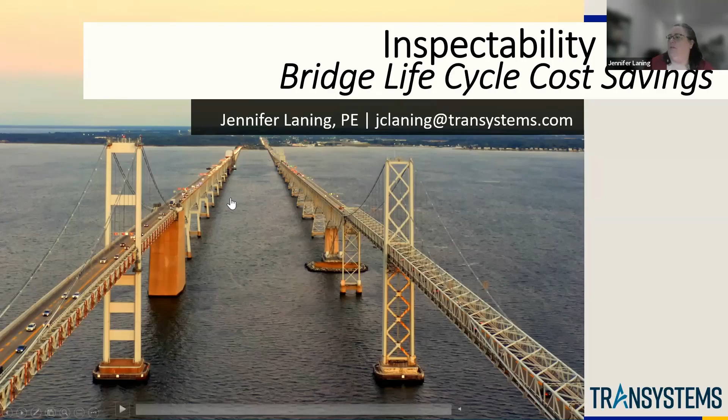Thank you so much for inviting me to share today, and I hope everyone really enjoys the presentation. This is based upon a presentation I gave last year to the National Council of Structural Engineers Associations, and parts of it have also been previously presented at IBC, the International Bridge Conference last year, not the whole thing. So as Lee and Faye mentioned, I've been doing this for a really long time, 31 years.

I'm qualified as a program manager under the NBIS, and also I'm a former bridge owner myself. For 14 years I managed the bridges across the C&D Canal for the Army Corps of Engineers in Philadelphia, all long span steel structures, high level bridges, and I started doing that right out of school. So I have a long time working on both the public side and the private side, and much of what I cover today is really just a lot of perspective about what I do for a living and what the folks I work with do for a living, and how this work relates to what I think is an incredibly important topic now, which is the state of our infrastructure and how we're caring for it, how we continue to care for it, and how we could be more optimized in caring for it when we are working on design projects.

So first, we want to set the table and talk about inspection requirements. The NBIS, as a lot of you may know or may not, is actually recently changing the standards for bridge inspection, but it didn't change things that are really important called the intervals, which is how frequently the inspections of publicly used structures must occur.

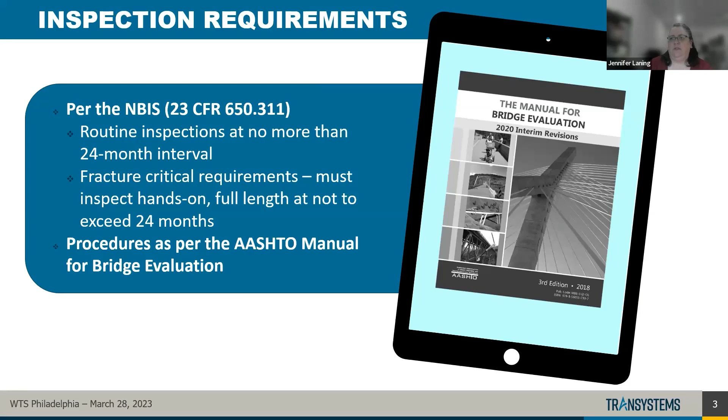So then the procedures for inspection. You're going to see people on bridges inspecting them at no more than 24 months. Sometimes it's less if the bridge is in a particularly challenged condition, but that's generally the status. The procedures for bridge inspection are in the AASHTO manual for bridge evaluation, the bridge inspector's reference manual, and different states also have their own manuals.

Part of inspection requirements is it's a pathway. There's general condition ratings for 1 through 9. And then there's newer standards that make you provide element condition states, which relate the condition state to quantity and are more granular in terms of talking about the individual components of a bridge and where they all fall. It all relates back to whether a bridge is in good, fair, or poor condition.

Then you add in things like appraisal items, which are our traffic safety items and deck geometry. The new SNBI actually takes a hard look at a lot of the traffic safety features and tries to relate that to what the design standards are. So that's gotten a little more complex.

Overall, where we're really at is we're looking at the deck of the bridge, the superstructure of the bridge, the substructure, and then the channel or the waterway. So overall, trying to decide where the bridge stands.

And every year you get these governmental releases of data because all the data is reported back, and it talks about where the state of the bridges are in the country, and how many are in bad condition in a particular state. And it really relates to funding and all those things.

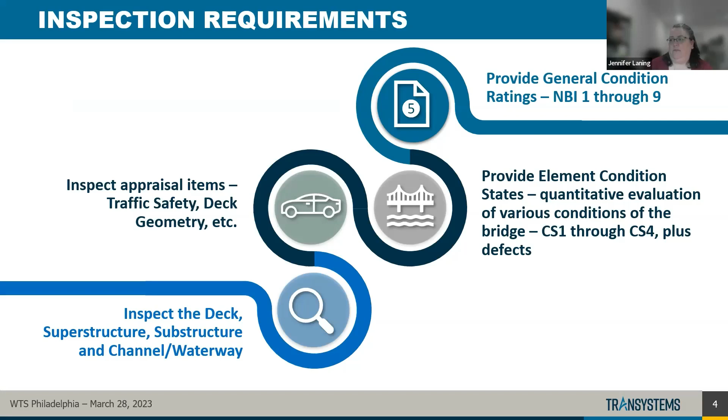And as you know, now we have a lot of the infrastructure funding out of the transportation bill, and taking a hard look at how we can do a better job of keeping our infrastructure in better condition.

So at the end of the day, inspection access is really what it's all about, and being able to access the bridge components and do that in a safe manner. Everything I'm going to say here really relates to safety of the traveling public and our inspection folks.

We need to walk the deck in some way. We need to look and touch the superstructure, which is all the portions of the bridge that's below the deck, including those fracture critical or NRSTM components.

And then we also have to do damage and special inspections based upon whether the bridge was struck, whether there's been an earthquake or a natural event, or whether there's a portion of the structure that we're keeping an eye on for a particular reason. Or if there's a special requirement like gusset plates for a bunch of structures that you need to perform inspections.

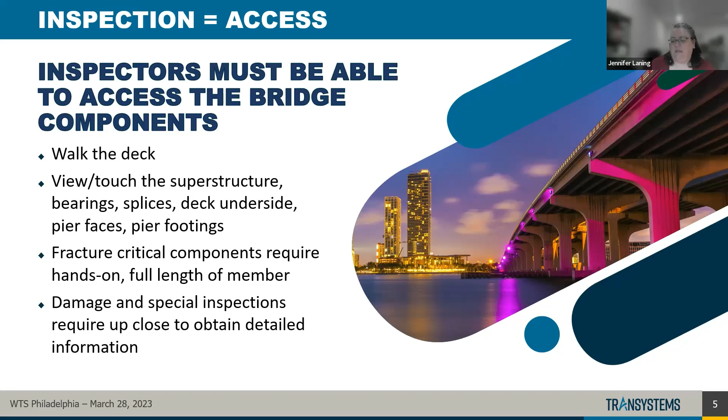To get detailed information, so there's different types of structures. We have rural structures that usually are smaller, they are simple. They might have low clearance or narrow approaches that need to be addressed. But then really getting into highway structures carrying mainline highways or ramps or grade separation structures.

I'm going to try and hide this thing at the top. It seems to be, yeah, here we go.

Mainline highways or ramps or grade separation structures. And then we have the really complex movable or signature bridges that are long spans. And in each of those you have different requirements, but we're really going to focus on highway and the complex and movable signature structures, and how inspectability is important to being able to properly assess what's going on with these bridges.

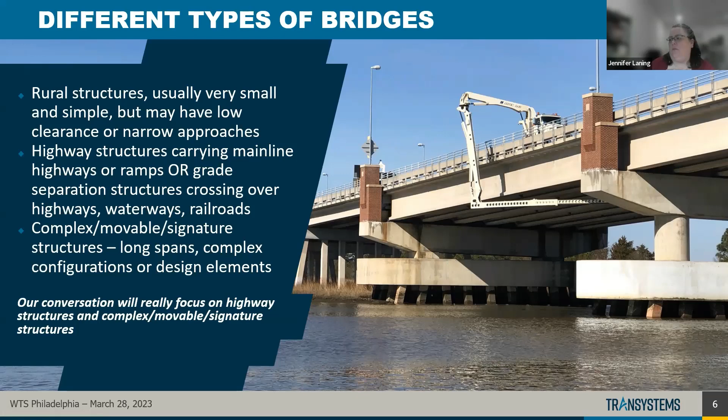So how do we get there? There's various methods of access. This picture here is the Chesapeake Bay Bridge in Maryland. And as you can see, sometimes we're really blessed to have access because there's ongoing construction, and we can work at will, which is rare, but it's great when it happens.

But decks, abutments, embankments at the approaches, those are usually accessed by foot. For the superstructure, you have snoopers, rigging, man lifts, bucket trucks from the ground below. And when you have substructure, especially tall piers or towers like these, you may have to rappel them, use man lifts if it's over ground, or from a barge with a man lift on it, or from boats.

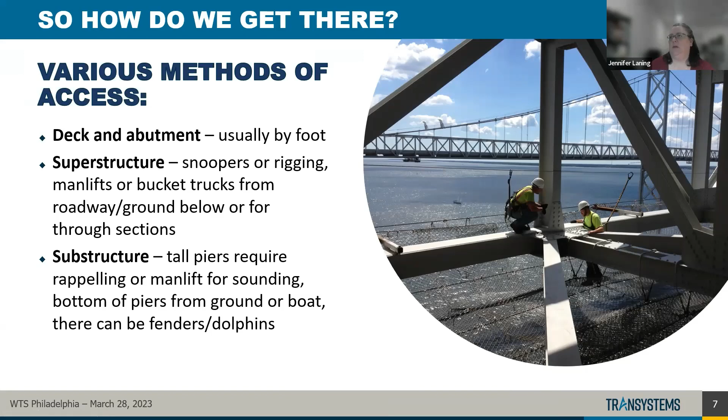At the end of the day, this is the main part of what inspection folks do for a living, this is where the challenge is, right? How to do this most efficiently, get the most time on the bridge, and do it in the most safe manner possible.

But I think you've got to take a look back at inspection costs, because you're designing a bridge maybe for a 100-year life, and there's going to be costs associated with that bridge over the lifetime of the bridge. Far be it for me to speak to design considerations, because that's not really what I do. But I think it's important to consider, when bridges are under design, how the inspection costs are going to accumulate over the life of the bridge.

That may come in several waves, based upon when a rehabilitation is scheduled, or as the condition changes over time. You have to consider things like the labor for an inspection, the access equipment and what that's going to cost to get to the bridge, then the labor that does that work, travel, supplies, safety. And then you have the maintenance and repair costs identified in order to maintain the safety of the bridge.

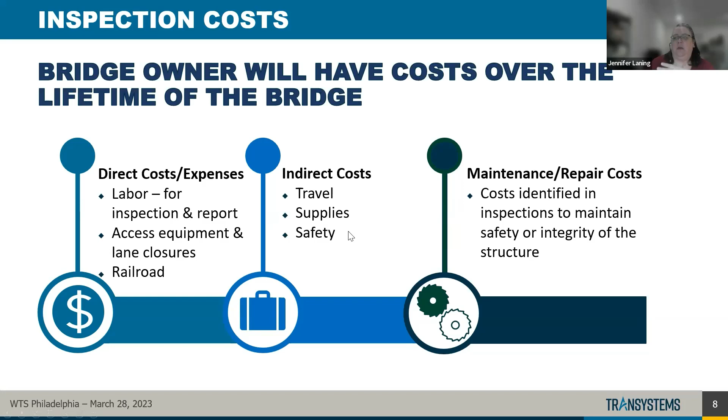When the bridge is brand new, it's going to be pretty static, maybe a 24-month interval, that sort of thing. But if the bridge finds itself in a period of decline, your costs may increase for inspections, because maybe the interval will shorten up, or people have to spend more time on the bridge. And then if they do a rehab, it'll drop down again. So those kinds of things have to be considered when you're thinking about the costs of a bridge over its lifetime.

So thinking about that cost breakdown, you have the labor, if it's complicated access, traffic control limitations, cancellations due to weather, especially if you're working from the deck in a snooper, because you can't take the snooper out if it's raining, it's not safe. And if you have a bridge in poor condition, it can increase the time on site, because you have to document the defects or take section loss measurements that would require a load rating. The condition of the bridge can also increase report preparation time, because you're writing down all this highly documented information.

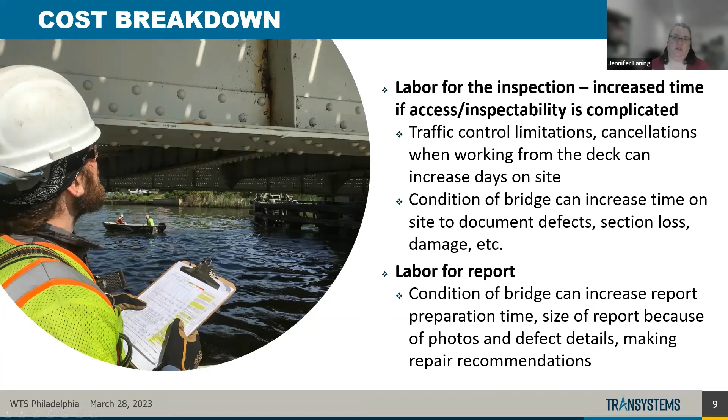So that's also a consideration when bridges have either challenging access or compromised condition. To throw some numbers out there: a snooper, an access crane, costs on the area of about $3,500 a day, and that doesn't count mobilization and demobilization for that period of work. A man lift can cost about $2,000. A safety boat required when working over water is $1,000.

Traffic control can really vary depending on where you are, but for most highway situations it can be $2,000 or more, depending on the requirements for that particular bridge owner, plus additional truck-mounted attenuators if you're running multiple crews.

And everybody who does this, and I know everybody who's on this call, I see some familiar names that know what we're doing here.

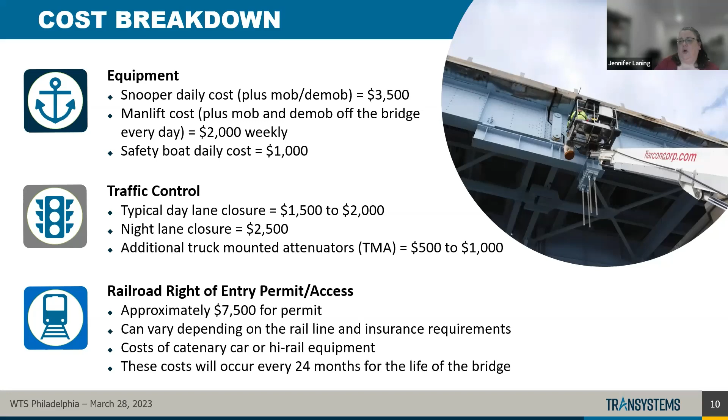Let's talk about railroads. Everyone's going to nod and say that's painful, because it can really make life complicated. Depending upon the bridge owner, if they're restricting traffic on the structure, or have shortened hours for access because it's a commuter route, or a tolling authority wanting to avoid impacts to travelers, or hot lanes and express lane scenarios where they don't want you in there during certain time frames, you can find yourself with only 5 hours, or having to work at night. You have to respect the traveling public and work around that, and it can make things really difficult. That can definitely have an impact on the cost to access the structure.

When you're looking for alternatives, part of the reason is cost. You can see in this picture that's 95 in Wilmington over the Christina River. You could take it from the highway, but it's going to be impacted by timeframes - you can't close the bridge down except between 9 and 2, and you can't do it in the mornings because it's inbound to Wilmington. Doing it with a boat, we don't have the same considerations. The cost may be equal or more because the boat's expensive. So sometimes you're doing it to get more time and be more efficient from a labor standpoint, and sometimes because it's cheaper or cost comparable to do it another way.

For complex structures, you want to look at ways to spend less time in a snooper because it reduces traffic control costs. It's a conversation we're always having when we're trying to price things out.

Some alternatives include bucket boats or barges with man lifts. The cost is about the same, but your time can improve because they can work from 7 in the morning until 3 or 4, they don't have tolling restrictions where at 2 o'clock you have to come off. Rigging is cost equal, maybe sometimes increased, but your time can improve.

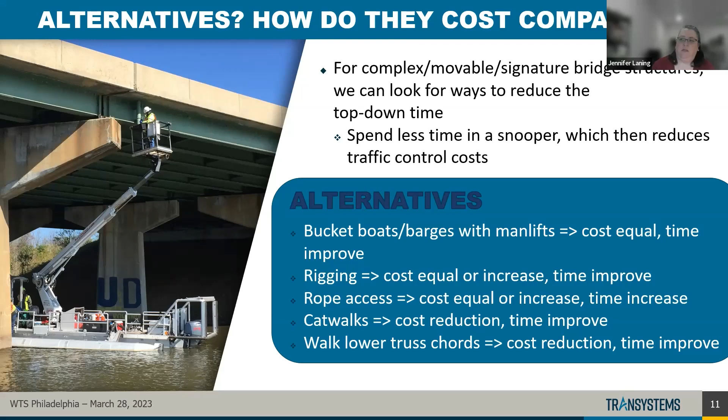These aren't hard and fast rules, but those are the conversations we have when we're looking at how we're going to inspect this bridge. You don't always just go with how it's always been done - sometimes you have to be creative and challenge yourself to look for new alternatives.

So overall, why is inspectability important? I'm not a designer - I'm actually very vocal about saying that. But I do think we bring a lot to the conversation from an inspection standpoint, because standard practice as designers - and I've been involved in some design work early in my career - is to consider bidability of the construction documents, constructability of the design, and operability of the asset.

But where does inspectability fall in there? I think sometimes it gets ignored. There's a link between practical design - really thinking about does this design make sense - and inspectability, because upfront planning can really impact the long-term costs and how operable the bridge is over the life of the structure.

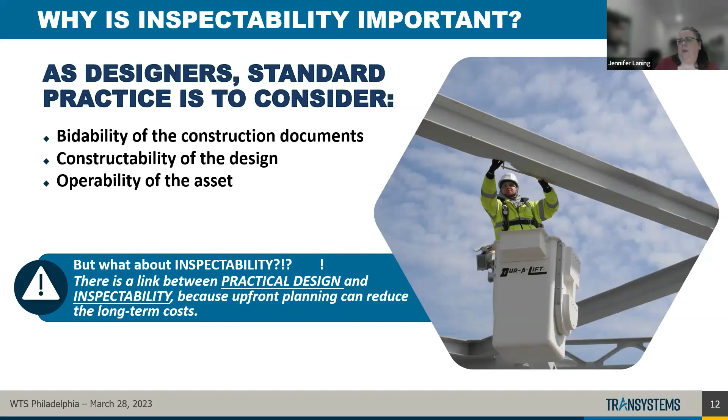There are numerous papers and technical notes on this. I was actually surprised when I originally wrote this presentation and the article associated with it, because I thought I couldn't be the only one frustrated about this. Let me see what I can find. I actually found quite a few references that focus on improving current inspection challenges and offering proposed modifications for future design practices.

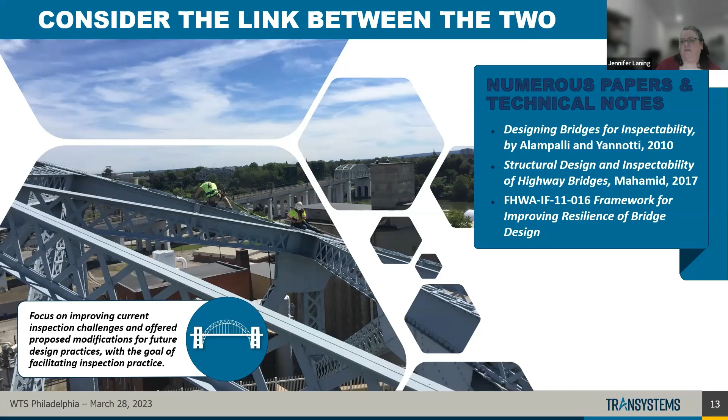I've had opportunities in my career where there was a design, and I was sitting on the side helping facilitate conversation about where we could take this. I'd say things in meetings like, what about inspection? A lot of people were like, oh, you're right, there should be a way to do what you're suggesting in future safety and access inspections.

So this paper by Alampalli and Yannotti talks about the responsibility of bridge designers to ensure bridge details are designed so you can visually see everything, because at the end of the day it's a person looking at things, and decisions taken during that process can influence the bridge service life. Okay, so great.

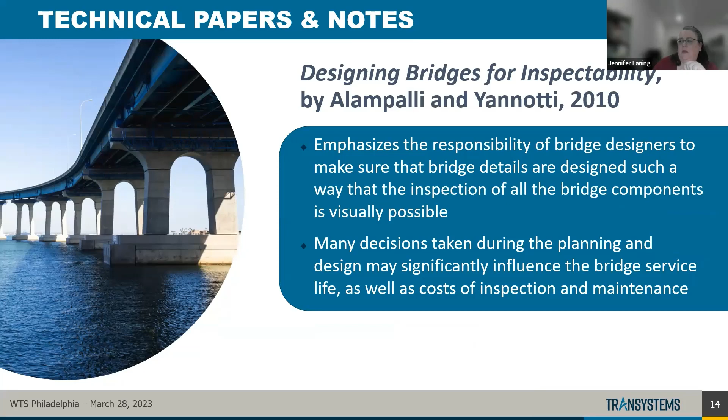Now this next paper talks about regular inspections and maintenance. It actually brings maintenance into the conversation, discussing the importance of considering the inspectability of a structure during the design procedure, including locations that are prone to deterioration.

And I know all my friends on this call who are inspectors are nodding their heads vigorously, thinking, boy, that's the hardest thing I've ever had to try and stick my head inside of to see if it's still good. You want to look at ways to think about these critical details, right? So again, a great reference.

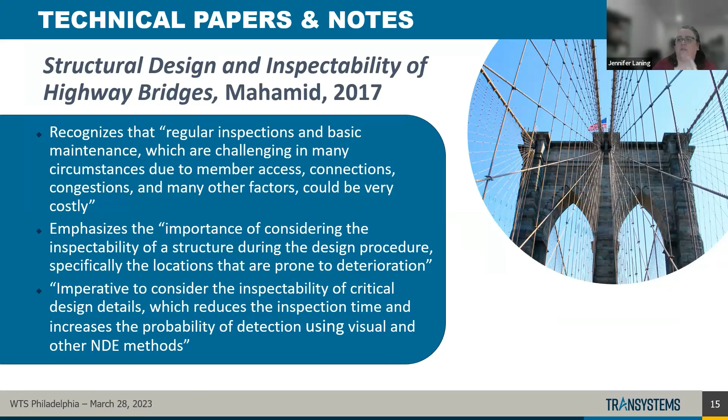And then finally, the FHWA has a framework for improving resilience of bridge design. Resilience is a really big hot topic word right now. This dates back a bit, but talks again about failure design and fault trees, and thinking about how problems with regular inspection increase over time, becoming more problematic the longer they're in place.

A perfect example, jumping ahead a little, is a connection on a truss that has 4 or 5 different members coming into it. That's only going to get more complicated the older the bridge is, when you have pack rust and debris lodged in there, and water—water is our enemy, of course.

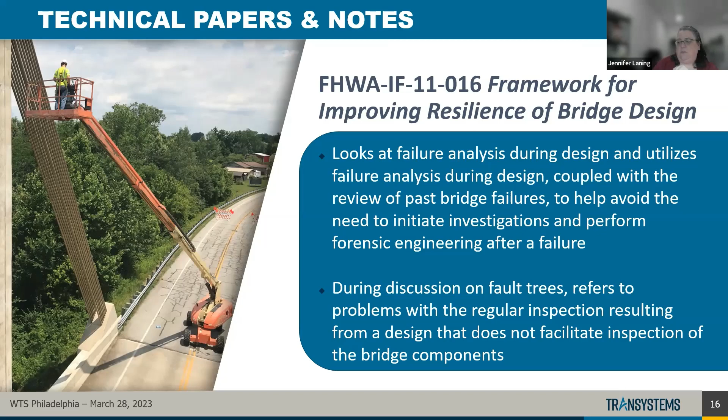So looking at a design that doesn't facilitate inspection of the bridge components—thinking about these things. The use of BrIM, referenced in an ASCE technical note, utilizes a digital representation to explore the inspectability of the bridge. Everyone talks about BrIM now for design, connecting OpenRoads Modeler and Open Bridge to fabrication and design, but I think there's a component we're not looking at, which is using digital representation of a bridge for inspectability.

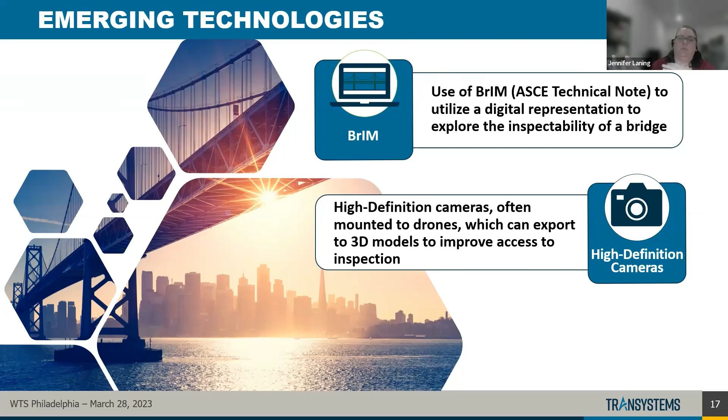We can also look at how we utilize drones or UAVs with high-definition cameras to support bridge inspection. The new SNBI that I referenced has a lot more latitude for the use of drones in a programmatic way. It's never going to necessarily replace people, but I think it can be used to help us do our jobs.

So the takeaway from the references is that thinking about the cost of time spent during design to address inspectability can help with best practices. Agency manuals require that designers consider inspectability—I saw tons of them when writing this—but I honestly can't tell you if that's really considered, or whether we're at the level of an actual design review where a subject matter expert in bridge inspection, someone who does it daily, is taking a look at plans and saying this could be better.

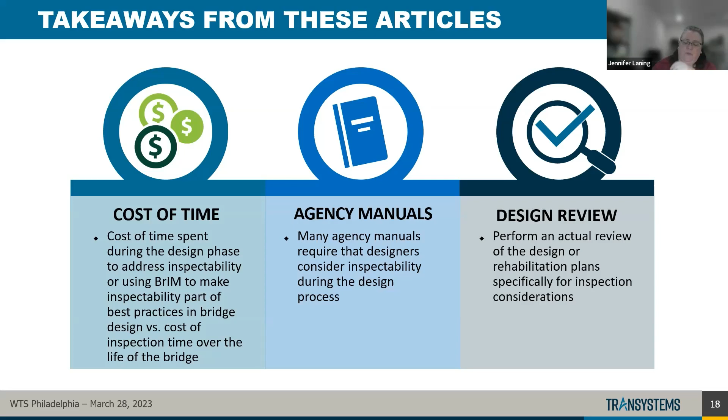I don't know if that happens all the time, but I think it should. So that's, again, just my opinion.

When you're incorporating inspectability into design, there are three ways we can go about it, and we have these icons to follow through: considering the type, size, and location (TS&L) level and design details to think about inspection; improving safe access, which is the primary goal for all of us—we want our people to come home every night, and people driving on the roads to be safe; and finally, the connection between the two, which is improving the ability to inspect the bridge visually. They all seem like I'm saying the same thing, and in essence, you are.

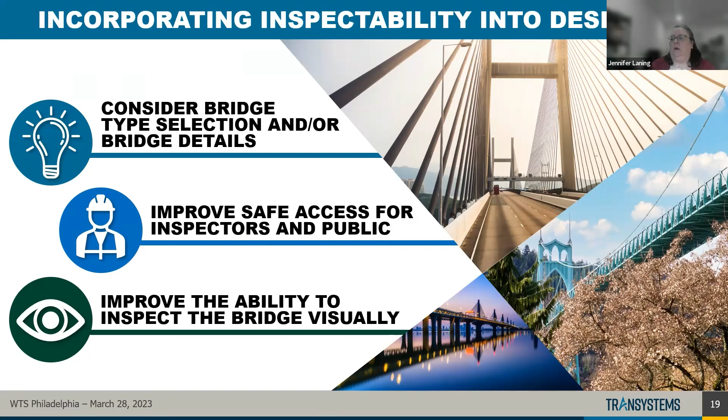But some things we're not going to be able to do anything about. I acknowledge that for some of these things, you really can't do much. But it's still a factor when you're working in this situation.

Looking at bridge type selection and details, our objective is to increase visibility to the inspector by avoiding uninspectable elements. We don't want lack of visual access to monitor condition, and we don't want areas that are unable to be cleaned or maintained, because that just makes things really difficult.

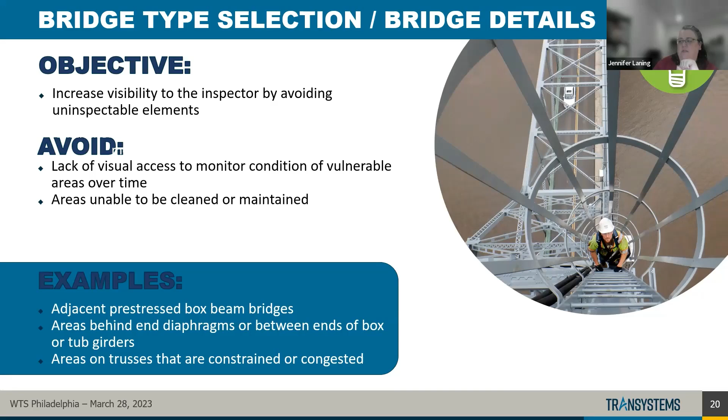We have a couple of examples here: pre-stressed box beam bridges, areas behind end diaphragms, and areas on trusses. Let's go through those.

With non-composite box beams—everyone knows about the one that failed in Pennsylvania, and they're still all over the place given how many already existed—because of the configuration of the box girders, the webs are touching. There's no deck, or sometimes just a bituminous wearing surface. You can't inspect the adjacent webs, and you can't look inside the boxes. Usually there are issues with relative movement of the boxes, which relates to water intrusion and cracking.

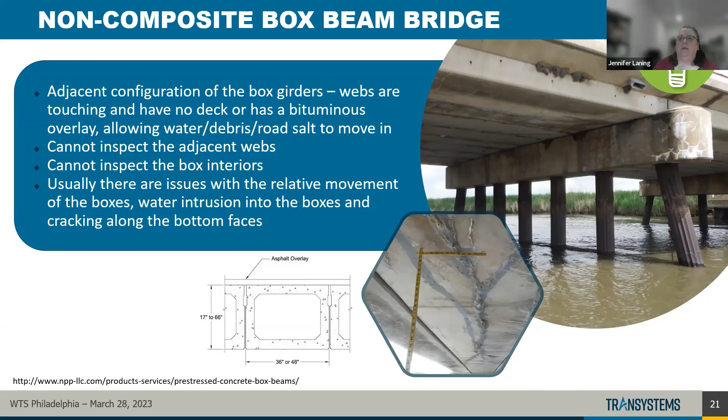It's a design detail that's just challenging to inspect with confidence—you can see as much as you can, but you can't see everything. There was a failure in 2005, and as a result, PennDOT now has very specific inspection and rating guidelines for this type of structure.

As a matter of fact, it allows for the entire rating to be controlled by the condition of a single beam. So how do you address inspectability of these structures moving forward? I think about how problematic they are, and things like making sure there's no water in them. This is one case where you don't really have a solution—it is what it is, and it just needs to be considered when future designs are put together.

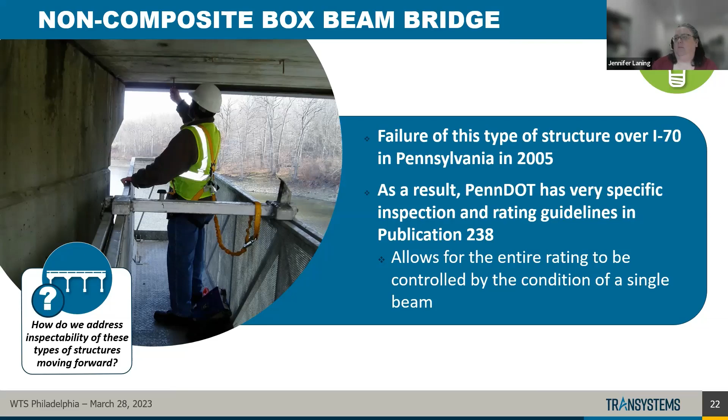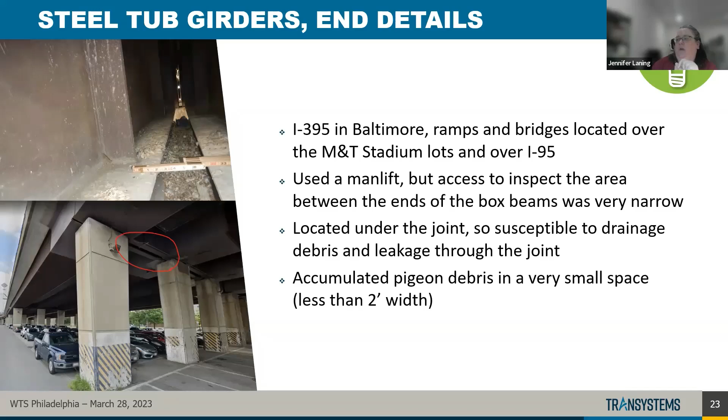You have to be prepared to get access to that area—we used cameras and had some of the smaller inspection team members access the area to take a look and make sure we had visual confirmation of the conditions. There was a lot of debris and those kinds of things that presented a challenge. Again, it's a design detail that's definitely an inspectability issue.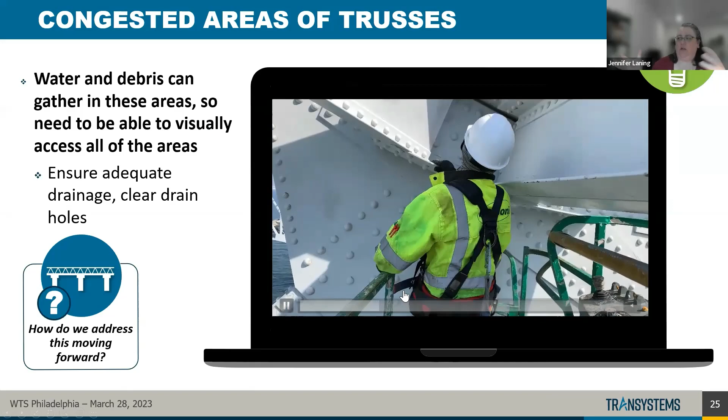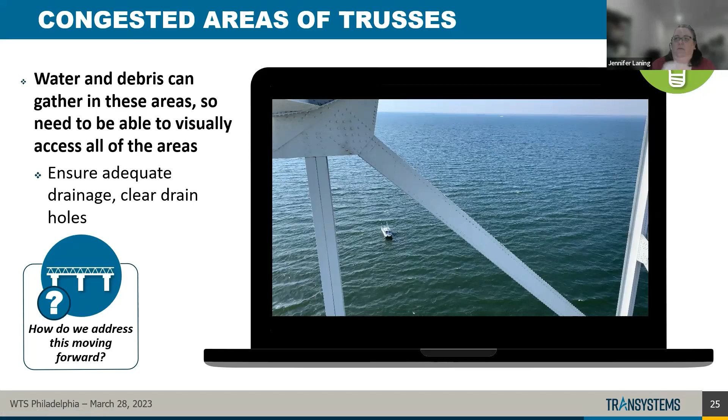I think this video gives you an appreciation for how really big that whole connection is. You're driving under it, you don't maybe appreciate that, but it's humongous and has a lot of areas to take a good look at. Looking for adequate drainage, making sure if there's drain holes or congestion. Typically the debris might be worse for the connection that's below deck off to the side, because road debris might fall in there. But making sure there's adequate drainage, and that the below deck portions are maintained and cleaned out.

So now we want to talk about that second item, which is improving safe access to inspectors and the public, while working safely for the public. This is where we can have the most impact, from design to inspection, because we can consider this at the initial design level or during major rehab, and small changes can make a tremendous impact. It can improve accessibility, it can improve the cost of the inspection, and ideally let's look for ways to get inspectors out of the traffic lanes.

I'd like to take a moment, because there was a terrible accident, a disaster, a tragedy in Maryland just last week. It was a construction site, but there was an accident that killed six construction folks on 695. This is why we have to look for ways to get people out of traffic lanes as much as possible. Distracted drivers, poor drivers, can really result in a tragic situation that we're all still thinking about down here in Maryland.

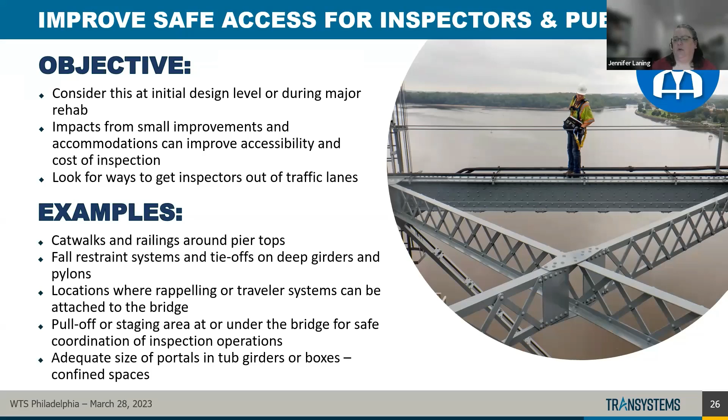But back on track for this - catwalks and railings around pier tops, fall restraint systems, locations where you can use industrial rope access or traveler systems, staging areas, portals, and tub girders. Let me go through this, because I think the pictures really help tell the story.

So you have to talk about both cases, both sides, right? Changing the access methods to work from below the bridge - I'll be 100% honest, they present you with a better opportunity to work more hours, or get a different perspective on things, but sometimes they also present a second set of challenges in terms of how you do that work. So you have to be prepared for that opposite side of things, as opposed to what I'm going to show you here, which I'll talk about in a minute.

Doing things with this traveler system required some considerations of how we stage this traveler, how we get it to where we need it to be, that in a different scenario, someone might say that's just too complicated and I don't want to do that - I'm going to go back to doing things the other way. But I'll talk about that in a minute.

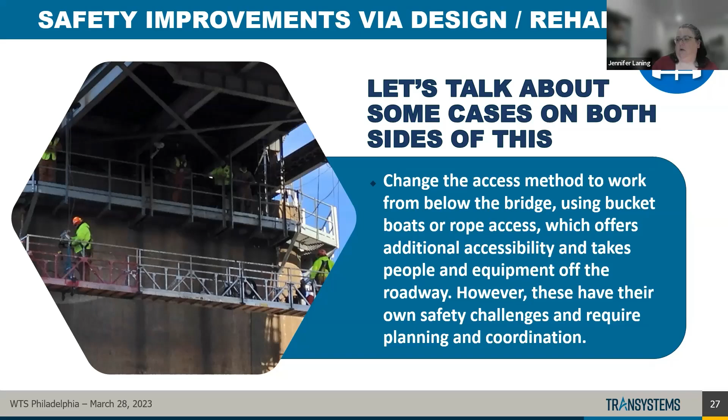So one of the bridges I'm familiar with is the Roth Bridge, which carries Delaware State Route 1 over the Chesapeake and Delaware Canal in Delaware. It opened in 1995, and there were definitely some inspectability challenges when it first opened. There weren't tie-offs on the pylons at the time for rigging or industrial rope access to inspect the above-deck portion of the pylon. There wasn't a consistent method for access to the cables either.

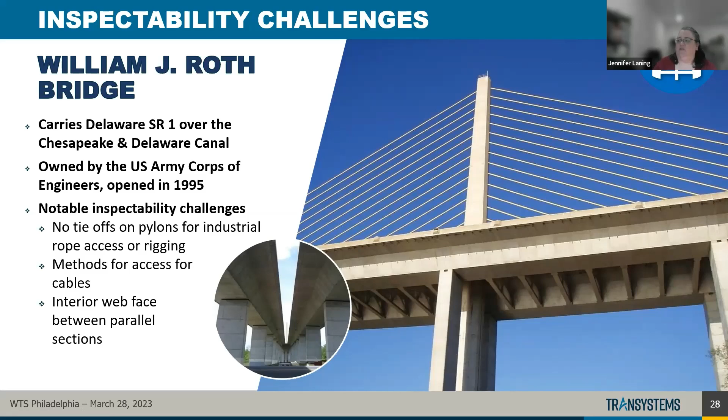And then there's this interior web right here - the underside part has interior web faces between the parallel sections, because the bridge was so wide, and the wings, quote unquote, of the trapezoidal shape were so wide that a snooper could not come up on the other side to look at that interior web. When you got down in the approaches, there's really no way to look at that, especially in the overwater portions of the structure. So that's definitely a consideration.

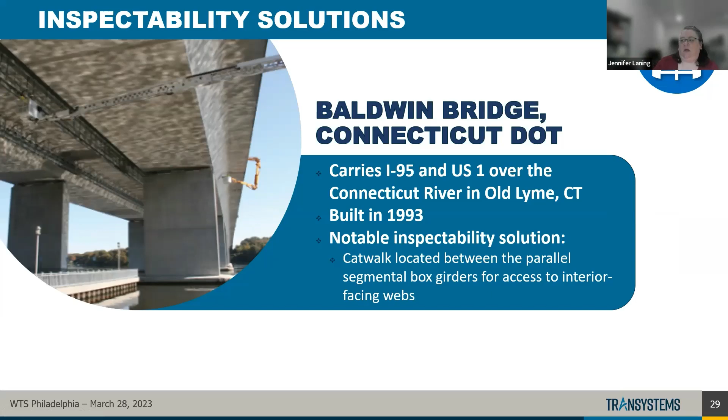Now on the other side of it, you have the Baldwin Bridge in Connecticut, a similar, not exactly the same, structure - not a cable stay, but segmental. They have a catwalk on the inside web of both segmental sections, so people could walk it and look at the interior web. You can see right here exactly - the snooper just can't come around and come up the other side in sufficient manner, but because they put the catwalk there, you could go and inspect. So there's a comparison of one way versus the other, and a thought that considers inspectability in the long term.

We have the Charles Cullen Bridge, also known as the Indian River Bridge in Delaware. This one opened in 2012, and it's a different type of cable stay bridge. It's not as high as the Roth Bridge, but they thought this one through.

They have a very wide sidewalk, which you can see in this picture on the bottom left, that can carry vehicles and is rated to carry a snooper. They have a little gate that opens up, and you can put a snooper out on the bridge to do the inspection, which is fantastic. They have access points to the sidewalk, and fall protection systems inside the pylons. So they put a lot of thought and effort into considering how to inspect the bridge and the best solutions at the time to make it easy and doable.

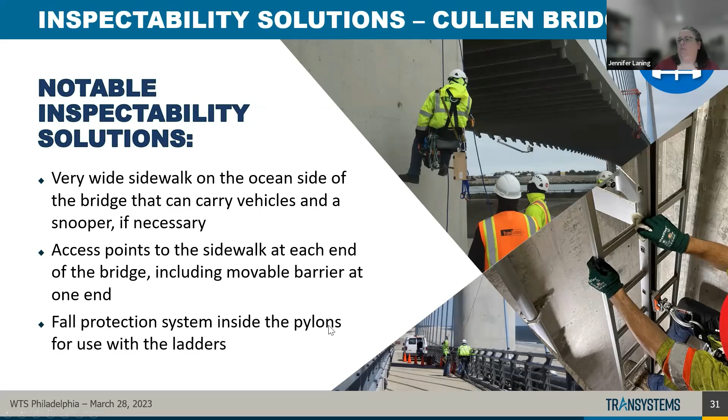There are portions of the bridge where the lane widths are only 10 feet, and for a period of time, the inspections were only done at night because you had to flag it down to only 1 lane. And the safety condition of the snoopers, because of the trucks, just was not working. There were some mirror hits and those kinds of things.

You don't want the snooper to go over like that. So it was becoming evident that you needed to be doing this in the daytime, and it was safer and better for the condition of the bridge. So we looked at a lot of things, especially after the I-35, where we had to inspect it because it was a truss bridge with gusset plates.

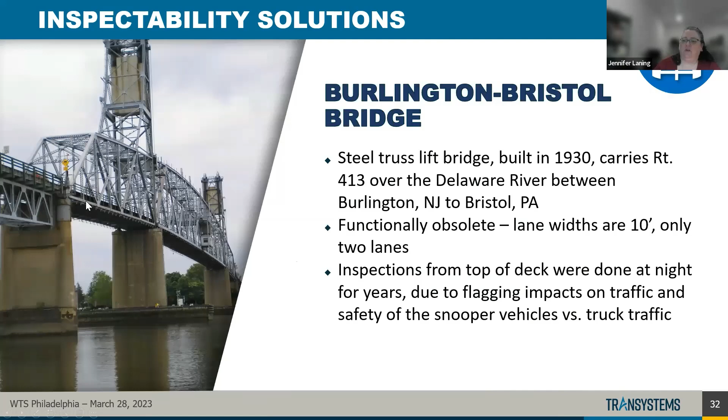We recommended a different approach to this and said let's look at this in terms of a maintenance traveler system. So this is the bottom chord, you can see right here, there's the truss and the main lift span and the tower spans, the back spans.

We went in and installed this rail. It's basically an I-beam on both sides attached to the bottom chord. And we use these mechanized rollers, called trucks, but it's basically a powered roller system that moves a suspended platform along the bridge.

Going back to that photo where I started talking about in the beginning, that's where the boat comes into play, because you have to stage this platform and have it come up from the water, bring it around the pier when you want to go to the next place. The great thing about it is that this is a window washer's pick, or a platform.

It's rented, they maintain it, they make sure it's good. There's no maintenance on the part of the crews that run the bridge, and it's certified and comes out, and it doesn't require long-term maintenance. This really gave the inspection team the ability to walk along the entire bridge, look at anything they wanted to, and has really improved the ability to inspect the structure in the daytime, but also give you a good amount of time on the bridge from a safe perspective.

So I think this was a good solution, and it was a rehab solution for this structure.

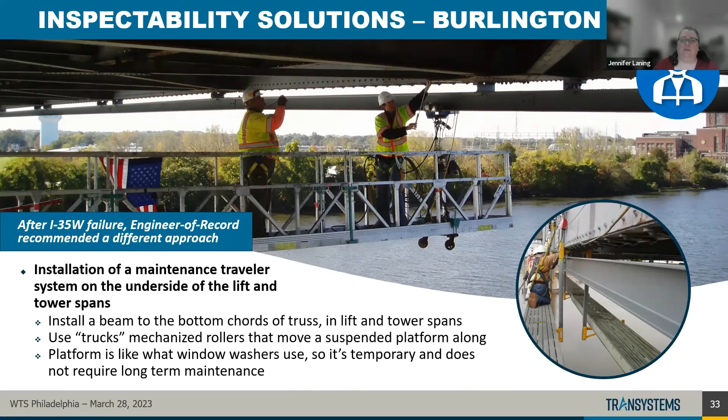And so then finally, and there's a bunch of slides for this, but improving the ability to look at the bridge visually. Some of these are very similar, it seems like I'm saying the same thing over and over, but sometimes you can't fix it, and it is what it is. That's just a fact of what we do in terms of our business.

But we really want to make sure that inspectors get sufficient visual and hands-on access. And even if it can't be solved, the request I make on behalf of inspectors everywhere is, think about it when you're doing the design.

Just think about, is this the best way to do things? And I'll feel vindicated, or at least that someone listened.

Looking at constraint, you don't want to have constrained or congested areas, areas that accumulate moisture, debris, roadway de-icing materials, those kinds of things. You have areas where there's a lack of visual access to monitor condition over time, so it's really hard to get to it and keep an eye on it. And so there's more likelihood of a problem or deterioration of the bridge components, or materials or areas that are unable to be cleaned or maintained.

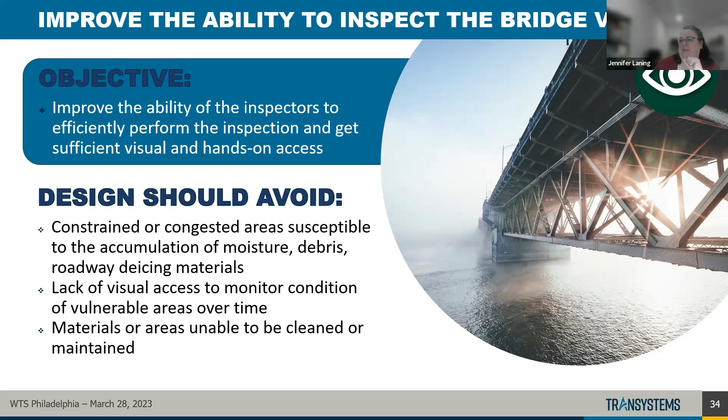I think any bridge designer anywhere, we all know joints are a problem, and whoever can invent the jointless joint or something is going to be a millionaire and a savior to us all. But in general, it's those kinds of things.

So when you're trying to plan and prepare for an inspection, here's the facts: inspections happen every 24 months, you know it's going to happen. We want to be productive and efficient because, let's face it, engineering is business. We want to be productive, we want to get the work done, and we want to be efficient about it.

Delays we cannot control—weather, traffic, railroads, whatever—and inefficiency, meaning it takes a lot of time to get where we need to go, affect that cost. And 90% of doing inspections, the secret I always say to people, is it's really not that hard. The hard part is the planning and the prep and getting out there and making it look easy. That's what we have to consider.

So when you're thinking about it, you have to think about how we're going to do it and when we're going to do it. And that's how you come up with what you want to do.

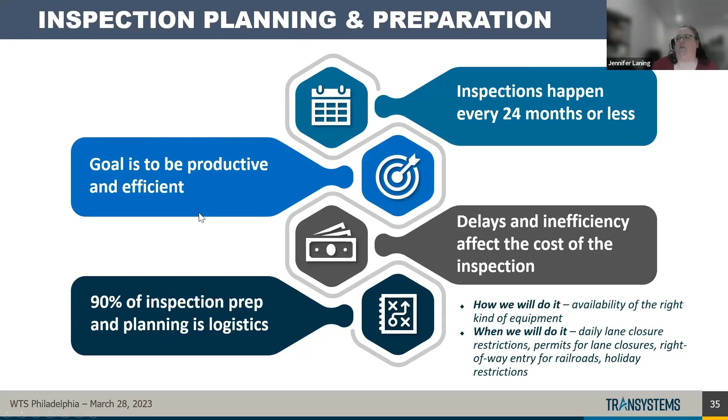You have to think about, when putting together your cost proposal or plan, what has changed since the previous cycle? Are there specific defects we have to monitor? How are we going to get to the stuff from above or below? How are we going to get to bearings and areas on the slopes?

One thing I'm seeing a lot of right now is areas where there are wires right along the abutments of a bridge—just a regular old highway bridge, but there's wires there. And we can't go within a certain number of feet of them until we're sure they're not powered, because of safety reasons.

How are we going to get to pins or cable ends? The number of pins that have caps, where you're asking an inspector to wrestle this giant 50-pound steel cap off of it in a snooper that's over water and everything's bouncing—just those kinds of situations.

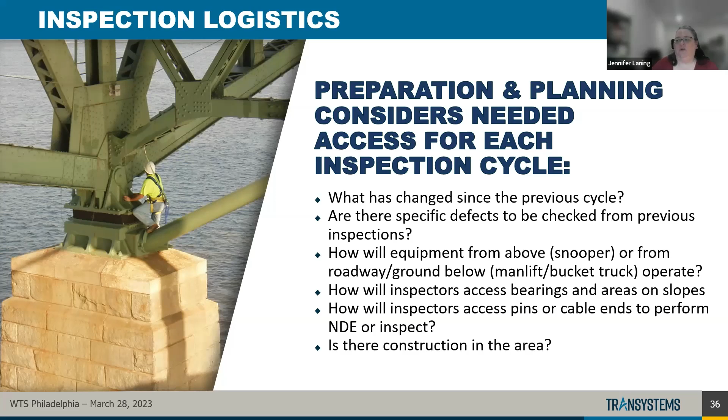And then, finally, is there construction in the area? Because that could impact where you're working at that time.

So here's some challenges: obstructions on the overboard side. In this case, it's a truss—can't do anything about it, there's going to be a truss. Consider use of catwalks or travelers to get to some parts of the floor system, but you still need to inspect the outer faces of the truss.

I'd be remiss if I didn't bring up the Hernando de Soto bridge, where the use of a drone was kind of being used to replace a little bit of the other inspection techniques, and there's a lot of discussion about use of travel of snoopers and not use of snoopers and those sorts of things.

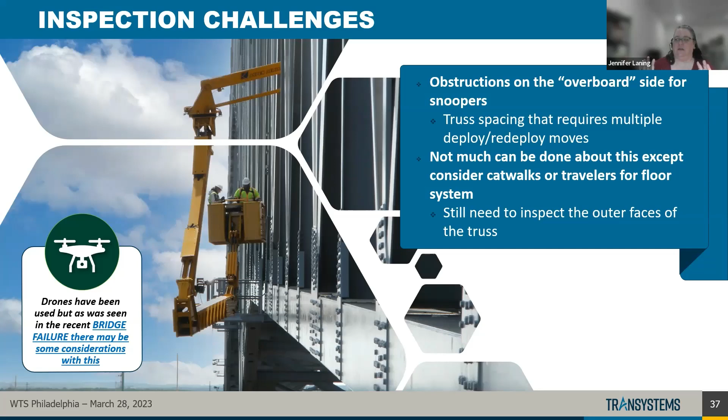You cannot adequately inspect the bottom chord of a truss from a catwalk, so you're going to have to use a snooper. But if you can only use it for certain parts and do the floor system from other things, then maybe you can gain some efficiencies. But every bridge has a different set of characteristics.

I did have—let's see if it works. If it doesn't work, we can just move on.

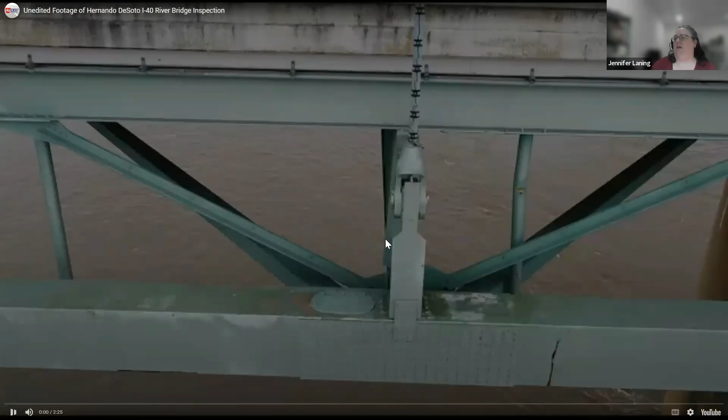Here's an example of using the drone to kind of inspect the hangers on this bridge.

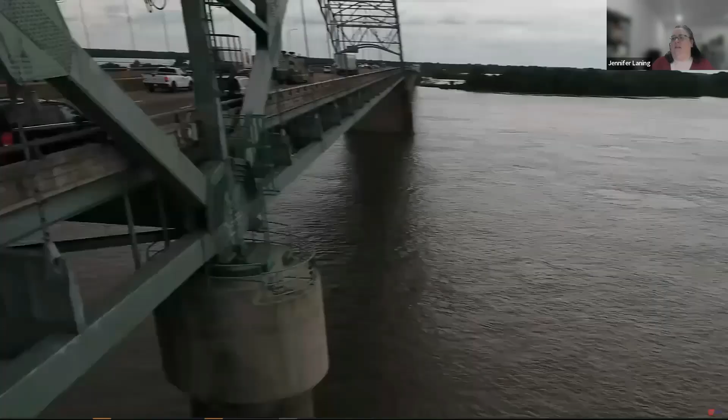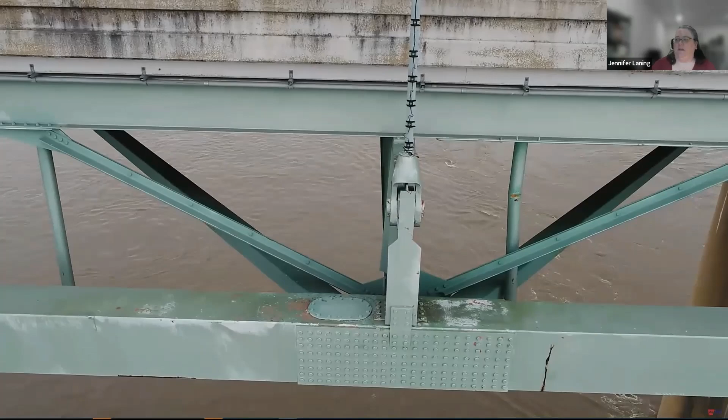They were doing that, and as we can see, there's value here to doing that. You can still see you kind of have to use a snooper because the catwalk that was subject of some discussion was further underneath the bridge, and you weren't going to be able to see the bottom truss from that catwalk to inspect it as a fracture critical member, full on hands-on, full length.

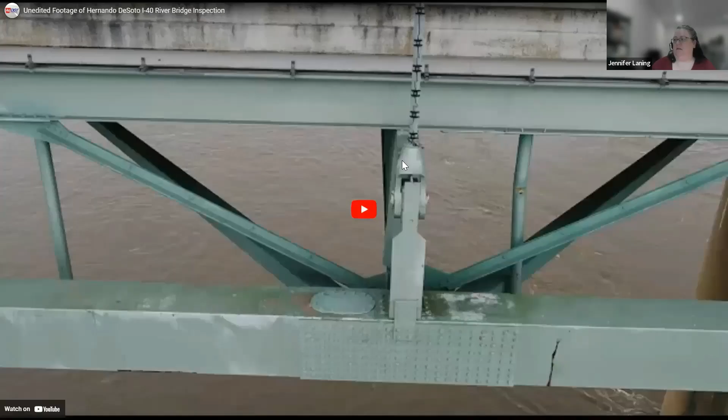But in other cases, moving on to obstructions on the overboard side, we've all run into this situation where they put light poles on the outside of the bridge, and you're going along making great progress, and now you have to redeploy the snooper multiple times to go around this stinking light pole.

We've had similar situations for high chain link fences or super wide sidewalks that you can't go across. Solutions for that can be remediated and designed by maybe putting them in a median, or I've seen certain places where they've just taken out the light poles, maybe for other reasons, but it's resulted in us being able to be super efficient.

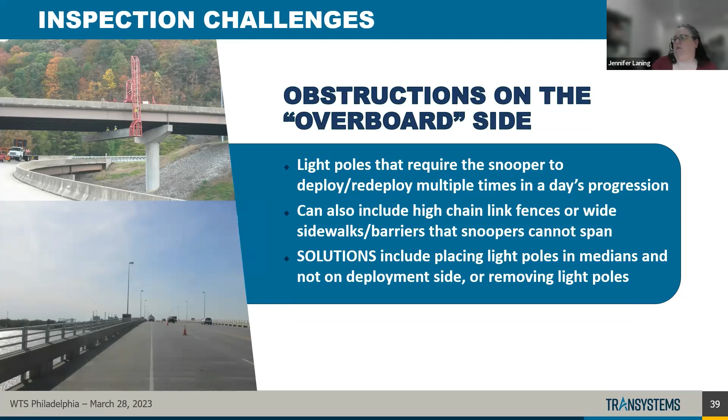We have situations with curved girder bridges where you have to go all the way across the road. Not much you can do about it, but again, it's a challenge and it's a significant consideration for inspection coordination.

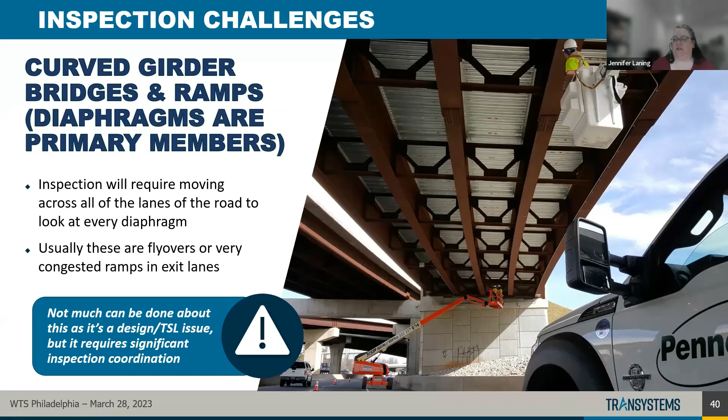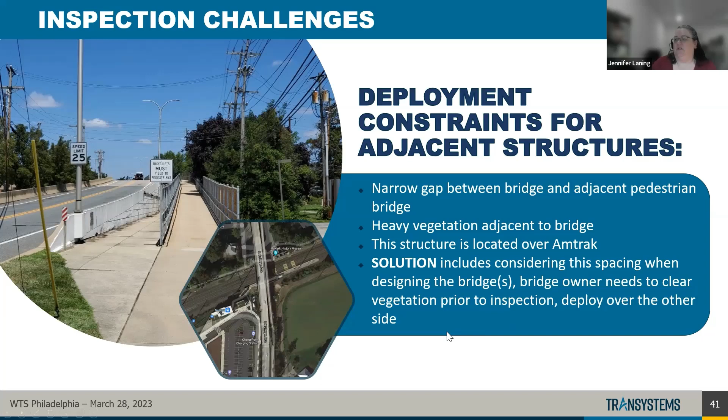So you pretty much have to go over the other side or work from the rail itself with a cat car. There's not a lot of choices for you in this case, and the vegetation can also be an issue. We have cases where you have deep haunches that can't be overcome by the standard equipment.

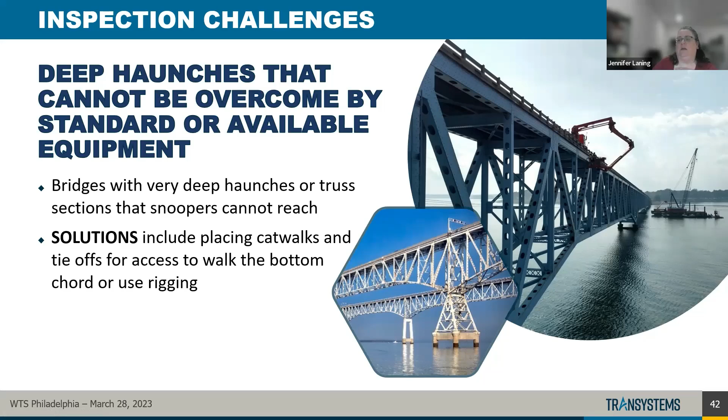We have cases where there's bridges that are load posted and the only solution is potentially rigging because you can't put a vehicle on it. In that case, again, you have to think about how you're going to do this. And it's just a challenge.

But usually, sometimes you're in a case where your choices are very limited because of the condition of the bridge, and unfortunately that's the way it is. Hopefully we aren't letting some structures get to this case where there's not a choice.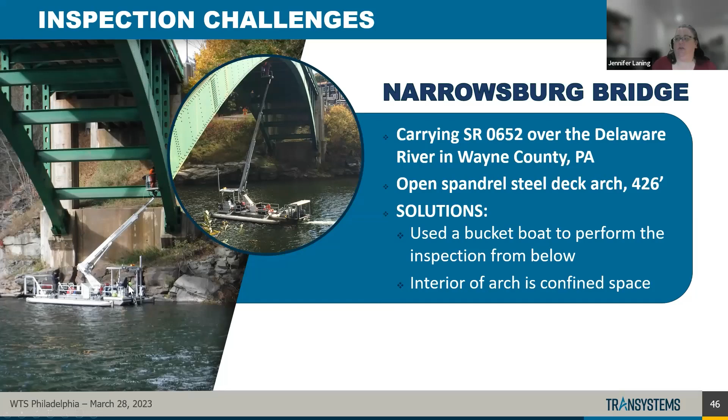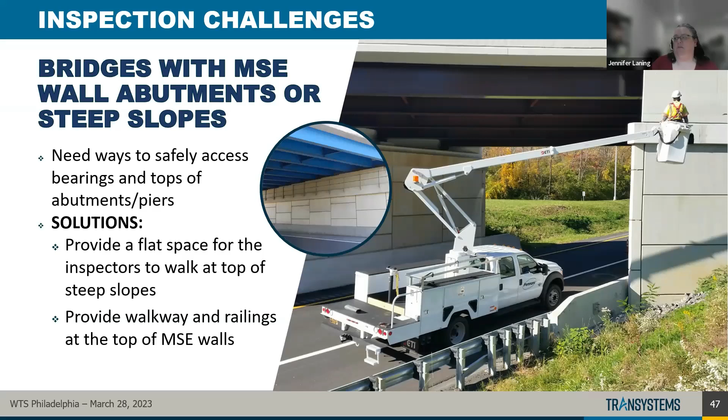This one is one of my favorite ones. We have a lot of structures with a very steep slope embankment coming off the bridge, or MSE walls. There's a bridge owner, the Delaware River Bay Authority, with a few bridges that are like on-ramps and off-ramps — they came in and provided a walkway right up against the bearings on the abutment/MSE wall that allows access for inspection, taking the truck out of the situation and the traffic control. That's amazing, and I think we should consider that too, when we slope embankments on a highway, a grade separation structure, or a ramp — where we can cut it back, sometimes paved with sidewalk type paving or riprap, but putting a flat area near the top to make sure inspection access is safe, so people don't have a tripping hazard or danger, would make it a lot easier. It's a simple solution to a challenge, to make sure people can just be safe while they're working.

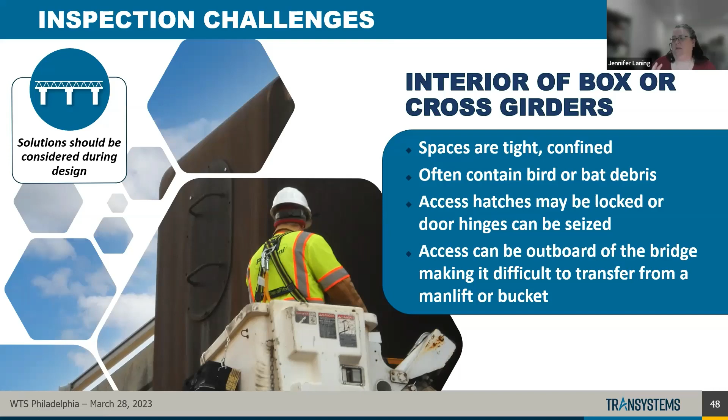We've talked a lot about access, but sometimes you have these cross girders, and I can't tell you how many are tight and confined. Maybe the doors don't open, and the access is outboard of the bridge — so how do you get into it? There are a lot of challenges with those kinds of things. I'm not a designer, so I don't know what to offer, but access to those isn't always easy — they can be small, and you're asking people to transfer from a bucket truck or whatever into this tiny space. So we have to test the area, and that kind of thing is also a consideration. And then thinking about where a detail is placed, and what is over it, is also something I'd offer for consideration.

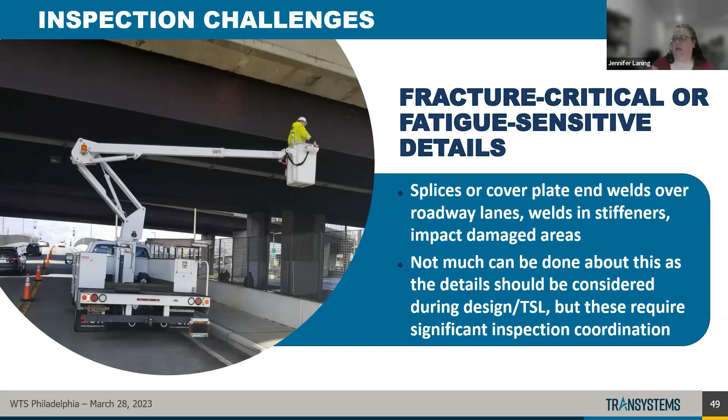Here's another case where the member is located outboard. To do the sign structure that's over here, they have to either climb over from the top to test the anchor bolts, or get a bucket truck and come up from the underside for the regular NDE. It's really awkward and in a weird spot. It's an interesting thought process for how that configuration came up.

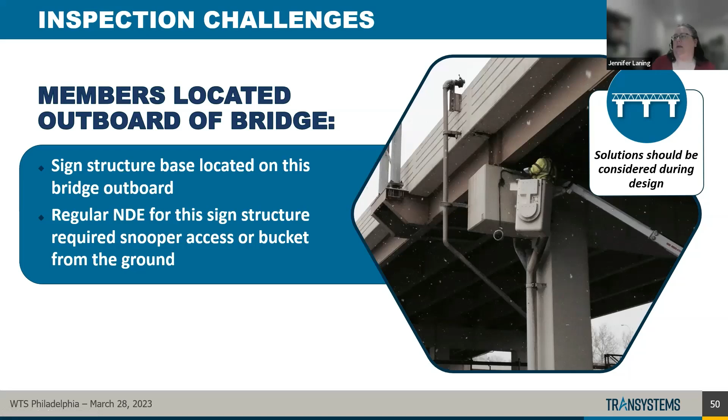Did anyone think about how that was going to be inspected? We talked about access for NDE and pins, and we have this case where there's a pin cap that had to be taken off. This is, I think, Indian River - they have these giant caps on the ends of the cables that have to be removed on a regular, semi-regular basis. The caps are very heavy, you've got to deal with all these bolts. Are we making sure that's something people can handle over water or while hanging from the bridge?

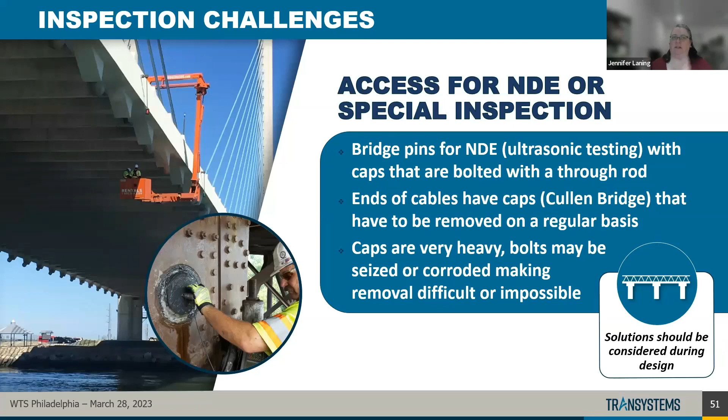I think thinking about those things in the long term might be a wise choice for how often they need to be inspected. Think about whether it's an accessible place on the bridge. There's not really a solution or alternative to a particular challenge. For existing structures, if we didn't consider inspectability way back, maybe there are other ways to incorporate it during rehabilitation, or figure out how to do the work safely. As we're having this opportunity to repair bridges, with the bill and money coming from an infrastructure perspective, think about inspectability.

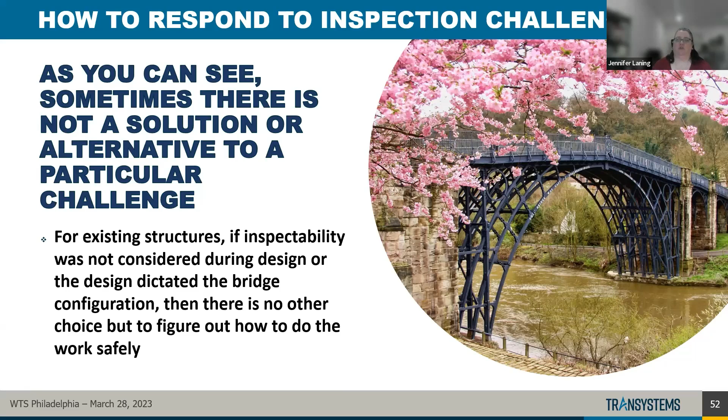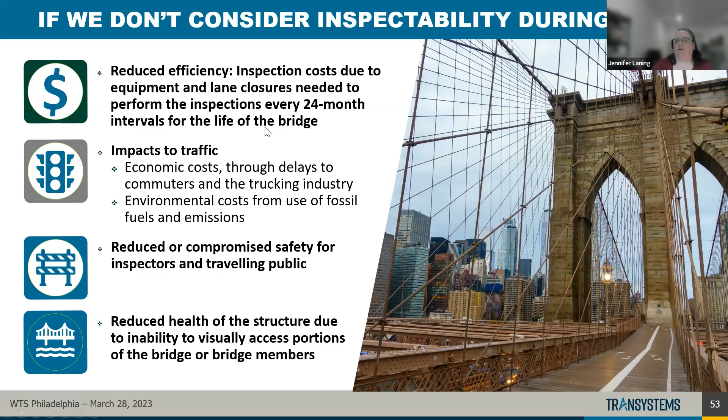That addition to the process can make more cost-effective choices for the remaining life of the existing structures we're trying to manage and maintain. At the end of the day, costs affect efficiency. We impact traffic, which is an economic cost - delays to truckers, delays to commuters, fossil fuels and emissions that cost us environmentally. We don't want the traveling public, construction people, or inspection people to be in a compromised position. These are our assets, things we should value. We've invested money over time, and the longer we can make them last, the better investment we have in the overall health of the country in terms of getting people from place to place safely.

So that's really the end of my spiel of stuff - safety and life cycle cost savings. So I can answer questions if anybody has any. I'm happy to do that.

I don't know if any showed up in the chat, Lee. Yes, there's a question from - let's see - there's a question from Ed Montgomery. Oh, hi Ed.

Should each biennial report have a section describing inspection access in detail? I think each inspection report should have that, and I think it helps people plan better. The areas I think it helps are when they say the best place to access this bridge is from here, or you need owner access for properties if you're over a particular property. But I do think it's good to take a look at what's listed there in terms of access, and ask can we do it better, can we do it more efficiently? Just revisit it.

But yeah, I find there's a lot of value to telling people this is how we access this bridge. I think maybe it should be discussed too if there's a challenge, and have people say we had some trouble getting to this area, and it should be monitored in the future, or discuss it with the bridge owner and say I think we need to consider a platform here, or a railing around the top of the pier would make it easier for us - that sort of thing.